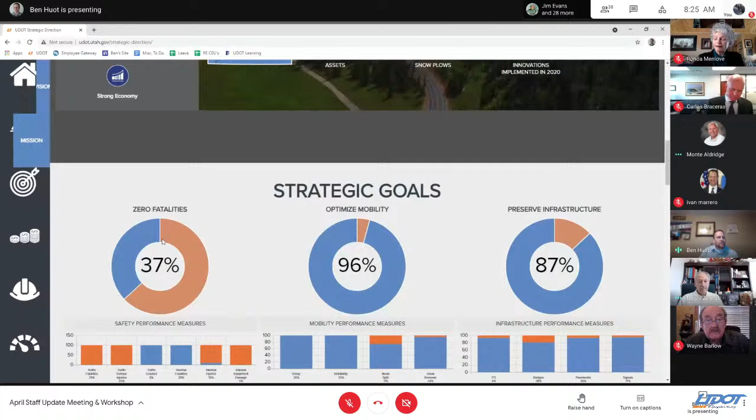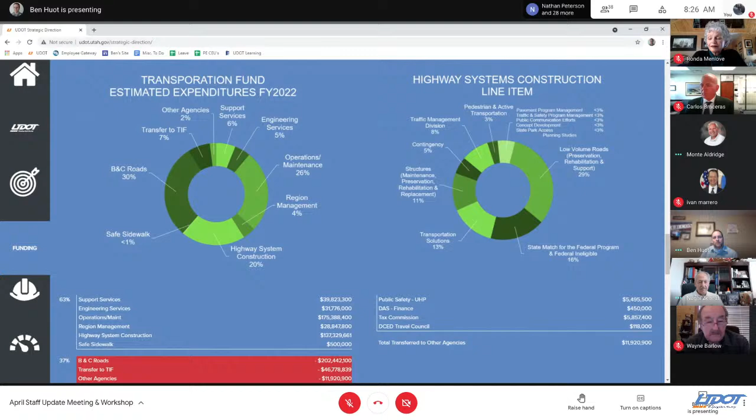I'm going to scroll down to the funding information. I wanted to point out that this is recently updated. Nathan Lee's group updated this information with the fiscal year 2022 funding information, and it reflects the information that Becky Bradshaw went through last month. For example, if you click on the transportation fund, you can see the revenue information that Becky Bradshaw went through. Then if you click on the expenditures, you can see how that is split up and broken out. We went over the highway systems construction line item that ties into some of our funding programs that we reviewed last month. I just wanted to show that's been updated with the current information.

Now I'm going to jump back over to the UDOT website, click on the Transportation Commission link, and scroll down to the process tab. We've seen this before, but it's always good to orient. Briefly, the excerpt from the Utah Code talks about the duties of the commission. The main point here is the commission determines priorities and funding levels of projects, and this is all done through public meetings and providing for public input.

We've also got a few excerpts in here from the commission programming policy. The basic takeaway is that with multiple different funding types, UDOT develops the recommendations and presents them to the commission. As it moves forward, all those programming items are compiled into a draft STIP and submitted for a formal 30-day public comment period, then sent to the Federal Transit Administration and the Federal Highways Administration for final approval. That is best shown through our calendar, a graphical representation of how that all works and progresses forward through our year. Last month, we went over the program summaries.

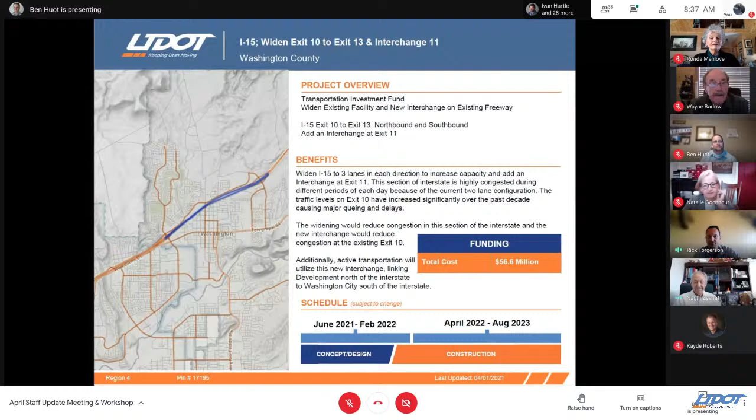Ben, if you want to move to the next one. Toquerville Parkway. This is a project that the commission took action on last March with the city of Toquerville on a jurisdictional transfer agreement, that if that city and the developer proposed to develop most of this road on the west side of Toquerville would build 2 lanes, 1 lane each direction, UDOT would jurisdictionally transfer the old highway of Toquerville over and take ownership of this new parkway. So legislative funding at $18 million is proposed, still the same alignment, to build the 4-lane road. The city and the developer would build the 2-lane roads, and then UDOT would work with the city to complete the parkway with the other 2 lanes for this $18 million. So this project would actually build the entire parkway design now, and we would still execute the jurisdictional transfer once this road is built with Toquerville. This would become the new state highway, and Toquerville would become the owners of the historic route through town. We're proposed to get started as soon as possible on this one as well. Any questions on this one?

Okay, if anybody has any questions, just stop me if you would, that'd be fine. So Ben, go to the next one.

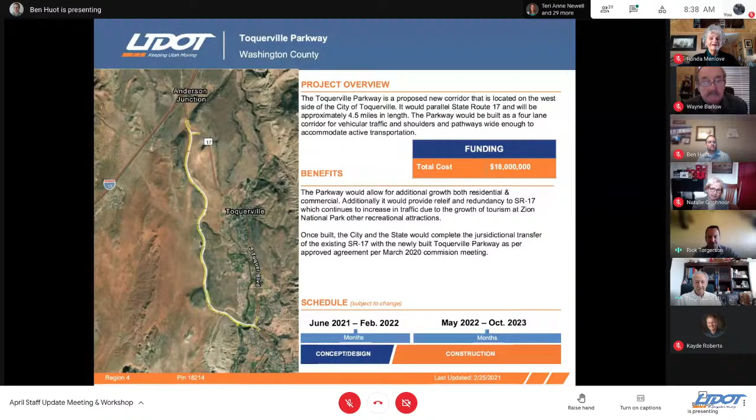SR 132 westbound and eastbound passing lanes. This is the connection between Sanpete County and Nephi. You see on the screen here the town of Fountain Green. This is the last town before you go through Nephi Canyon and come into Nephi, which is Region 3. We completed a corridor study several years ago. Region 3 and Region 4 partnered on a corridor study and identified multiple improvements to the canyon section. These are the 2 projects that came out at the top of the priority list there: a westbound and eastbound passing lane.

So the blue line there shows a big corridor, but that will be broken into a passing lane, one eastbound and one westbound, between mileposts 41 and 45. That's $6.2 million, and we'd start design as soon as we have approval, with construction next year.

Oh wait, we need to adjust this one. I think we're doing this one right off the bat as well. I may have the wrong construction schedule, I think we grabbed the wrong fact sheet. You're right, that should be 2021 and 2022 February, so it needs to be moved up a year. We'll update that fact sheet, but it's this year with construction next summer.

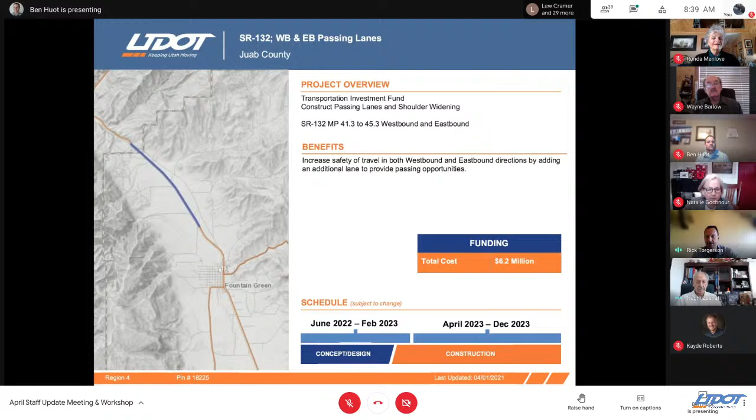East Zions roundabout and improvements on SR9. You had a presentation probably two years ago from the East Zions group, Brent Chamberlain with Kane County, and a couple of developers on the east side of Zion. This is in concert with Kane County's plan to construct a new visitor center on the east side of Zions at the North Fork intersection. Several developers are looking at a new Grand Lodge and a lot of improvements to create biking and walking paths and a whole new experience on the east side of Zions.

Kane County has received their CIB money. Now they're working with the developer for the Grand Lodge, because that's kind of the key to actually paying back their loan for the CIB money, and we're waiting with Kane County to see how that agreement with the developer happens for the Grand Lodge.

But once this happens, we will look to complete a roundabout at the new North Fork Road intersection, where the visitor center will be, along with several other intersection improvements along the corridor, a pedestrian underpass, multi-use path, and some wildlife mitigation as funding allows. We have a little over $10 million, and we're gauging the entire partnership with Kane County, and we'll start working on this project as soon as Kane County starts the visitor center.

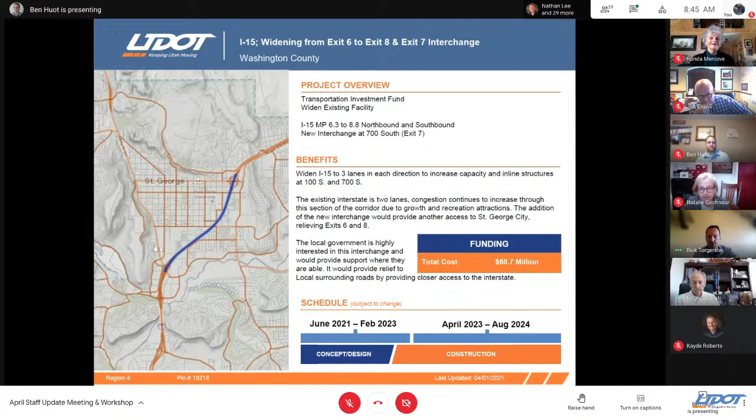Okay, Ben. The last one, I think this might be the last one. The last is I-15 northbound.

We just completed a project from the top of the Black Ridge, which is milepost 38, to milepost 43, near the Kanarraville rest area, this last summer. We're actually still working on a little bit of it right now. But this project would continue that 3-lane northbound section from the Kanarraville rest area all the way to the South Cedar interchange, so 43 to 56. That's a 13-mile long new 3rd-lane section on I-15.

As all of you know, the freight movement on I-15 just continues to grow coming out of the ports of LA, and this would continue that. There's still an uphill grade all the way to Cedar City. Once Cedar City starts to level off a little bit, but still the amount of freight traffic that we have on I-15 is impressive and continues to grow. This would add that 3rd-lane section to really deal with the speed differential between all the semi trucks and the travelers moving along that roadway.

So $50 million - this one's out there a couple of years, so we wouldn't start this until June of 2023, 2 years from the summer for the design work, and then we'd actually start construction in April of 2024 and go to May of 2025.

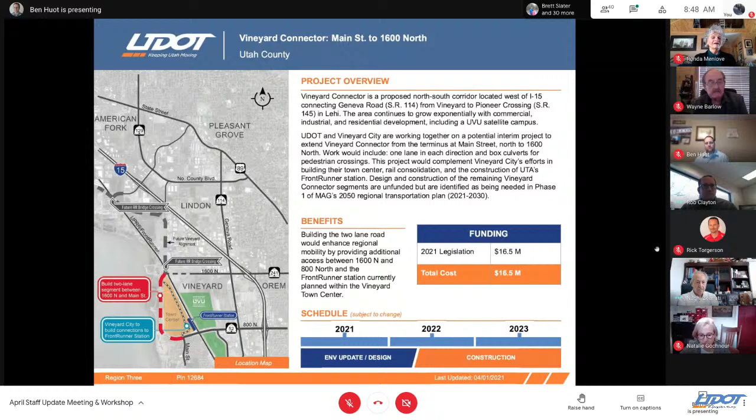This is the Springville 1600 South, 2700 North, Spanish Fork interchange. This is using an existing overpass on that 1600 South corridor that currently doesn't have access to I-15. This project will add ramps to that overpass and build a diamond interchange. Now, that project to build those ramps and some improvements around that interchange already existed - what the legislature did with this project is add the funding to widen 1600 South from the railroad overpass we're going to construct all the way over to State Route 51, on the right side of that map. So with this funding, it brings the total funding for the project up to $79 million.

At the end of the project, you'll have widened 1600 South. There'll be a structure grade separating the railroad from 1600 South. We'll have ramps that connect I-15 to 1600 South. The frontage roads - it's kind of a typical rural situation where the frontage roads are a little too close to the interchange, so they need to be separated away so that it operates efficiently. That work will be done. This is all currently being designed right now, with construction in 2022.

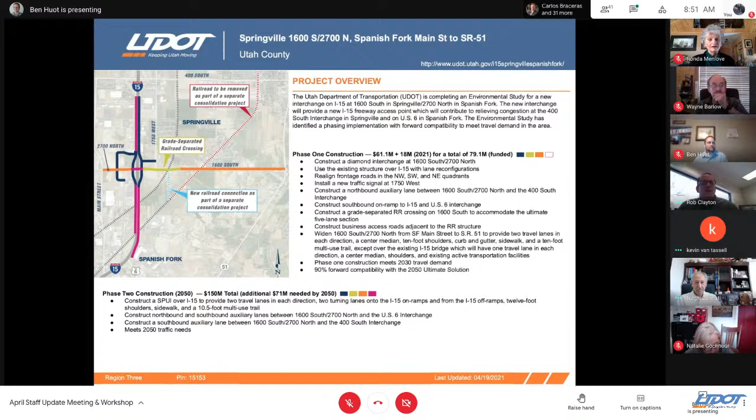Next slide, Ben. Oh, one more. Okay.

Next slide. Hey Rob. Yes, this is Jim Nagi, if I may ask a question.

Since that project is under construction there at the LDS Church and will be done by then, which may add a little traffic, I presume - I know the developer had to do some initial ingress, egress type lanes to get off of Geneva Road to there. Will any of that probably still happen temporarily, because that traffic will start to pick up then, which would be a year and a half or 2 before this project looks like it will be done? Are there some temporary things that are done to assist with that, or what usually happens in a case like that where a project is being done, but there's construction and traffic coming before the project's done? Are there any temporary things that happen in a case like that?

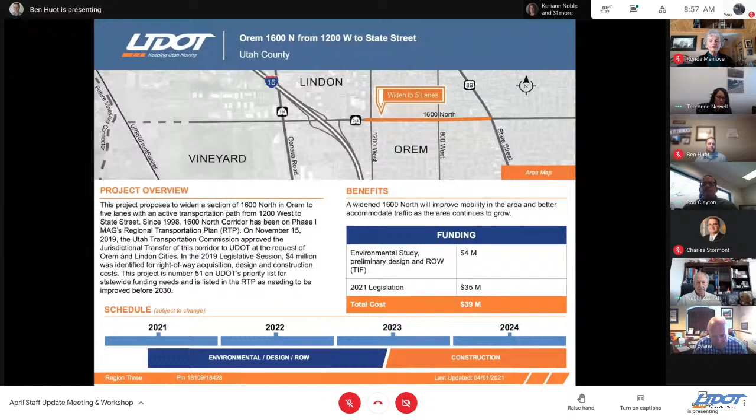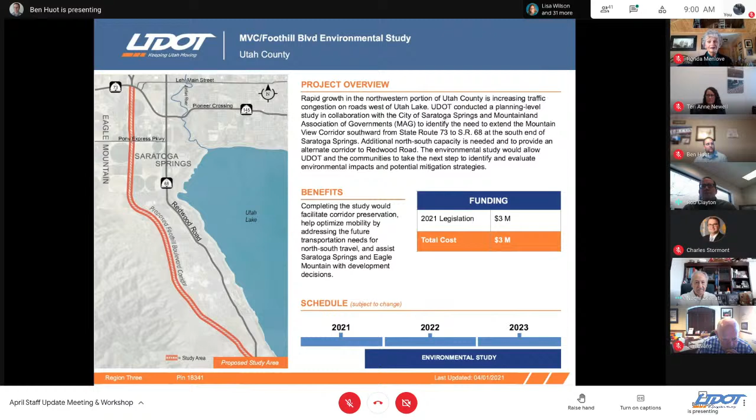And that's the last one in Region 3, Ben. Thank you, Rob.

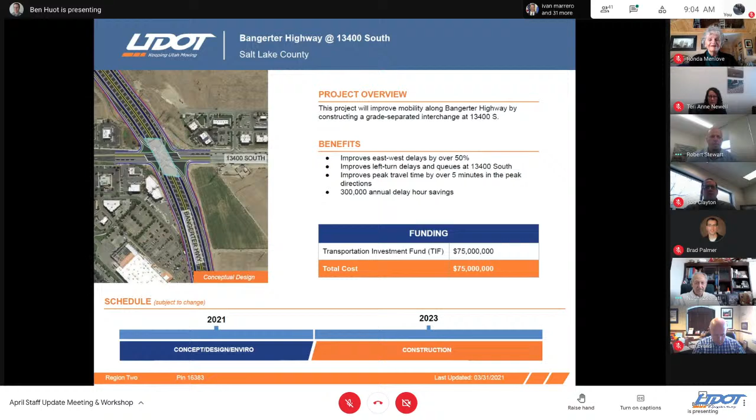Any other questions on this? Okay, the SR 111 project.

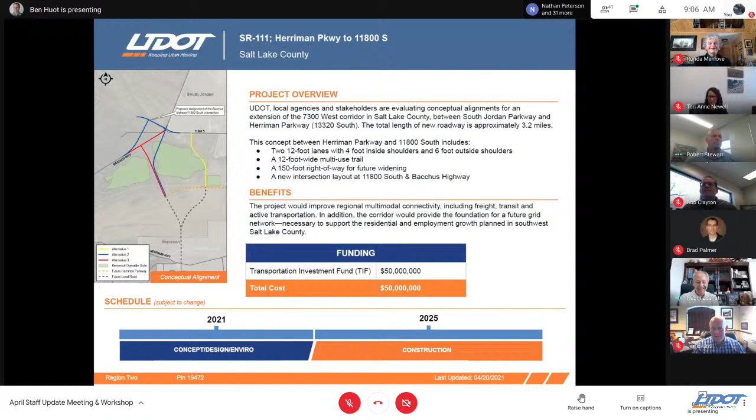Any questions on this? My wife said yes, so I guess that strategy worked. Sucker. All right, next one's Kimball Junction environmental study.

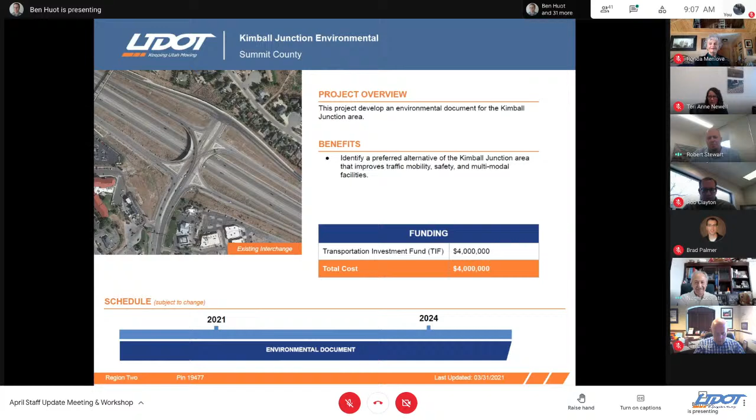Any questions? Ben, I'm not lobbying to go first next time. I was merely kidding.

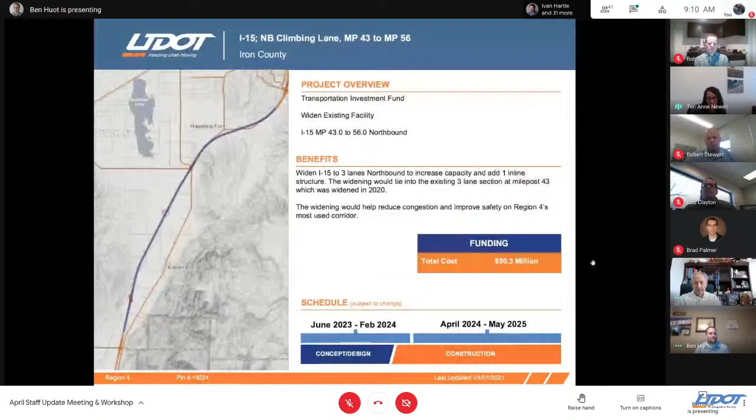We presented a lot of them to you, and as we keep using the language of saying these are legislated projects, so they were stated in HB 433, but they didn't have project values on them. Our job will be at UDOT to manage this list of projects to a total of 705 million.

You can see on this list what they total up to is 704,950,000. So it doesn't leave a lot of room for things to change on these projects, but the commission will be responsible for setting the funding levels on each of these projects. So you can't change what's on this list, but what you are approving is the total amount for each project.

So if we have a project that comes in under what we expect, which we hope there will be a few that do, because we will also have some that maybe come in a little over, we have some latitude. You have latitude to adjust those project values, but we have to total up to 705 million to stay within the legislation.

So there will be a little bit of a tricky balance with this list, and these projects get managed a little bit differently. Lisa and I will have to make sure if somebody has something that starts to go over, we may have to adjust the scope on it and back off a bit to stay under that 705 million total. So I just wanted to clarify for you and remind you that's how this list works, which is a little bit different from the next list we're going to talk about.

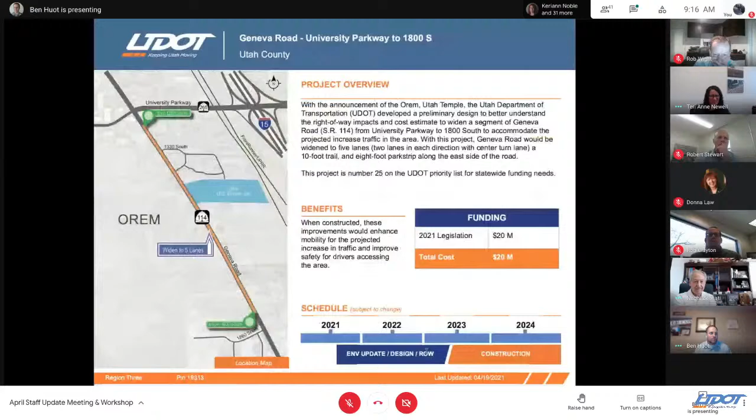So now we're going to transition into the regular process for TIF highway projects. This is related to a topic we've talked about a little bit called project prioritization over the past year. In January, I believe we went through some information on how we use the prioritization process and developed recommendations on these projects. This right here is the list of projects that Terry showed last month with respect to the prioritization process.

This slide is that same exact list in that same exact order with the project values and the estimated construction start dates at this point. And then, similar to what we did last time, for this presentation we grouped those by region and sorted within the region by estimated construction start date, so we can walk through them in an orderly manner.

Another question, Ben, from the public: did UDOT have any input on this list? As in, if the legislature makes a decision on these projects list, do we have any input from UDOT saying yes we should be, should not be, or any kind of comments?

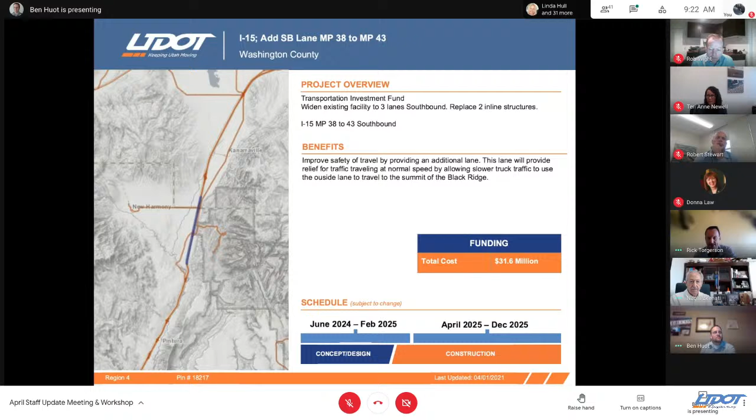These timeframes were all relative to overall cash flow in the entire TIF program, of how all these projects can fit into that entire program out to 2030. So that's our 2 projects in Region 4.

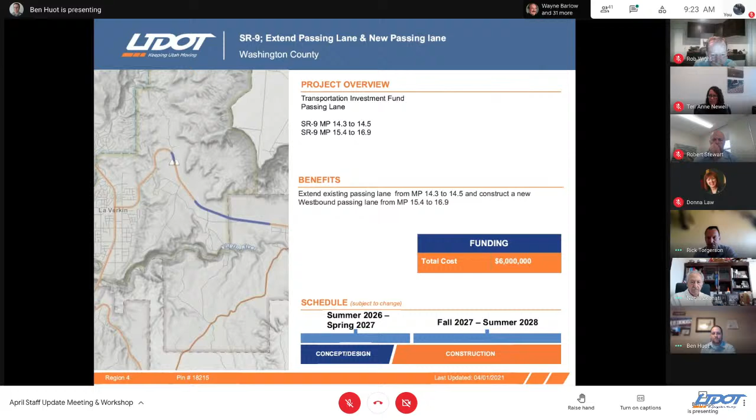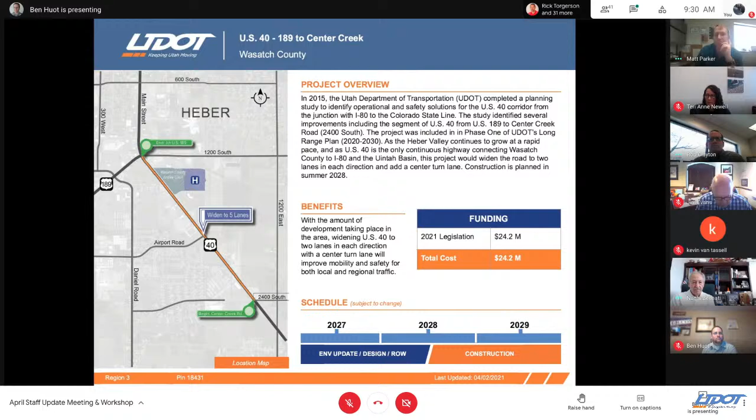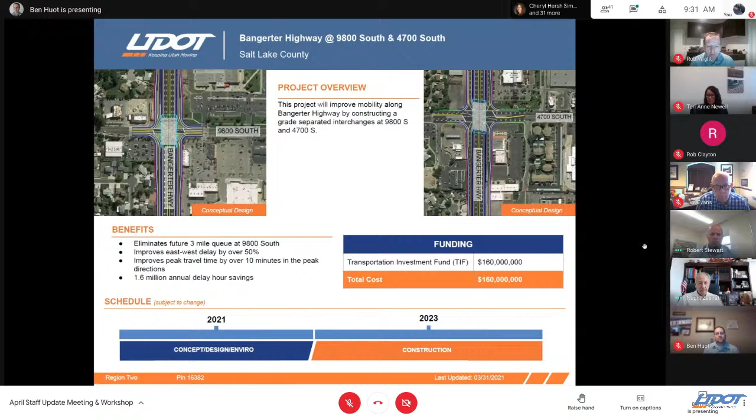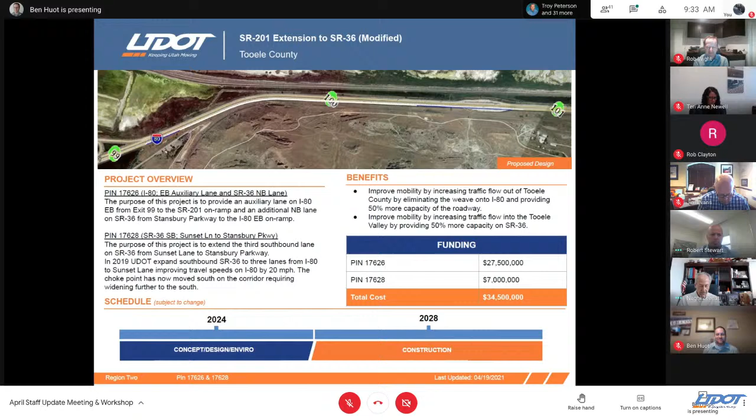Did I confuse everybody thoroughly? Did that make sense? All right, next one.

Any questions on this? The next one.

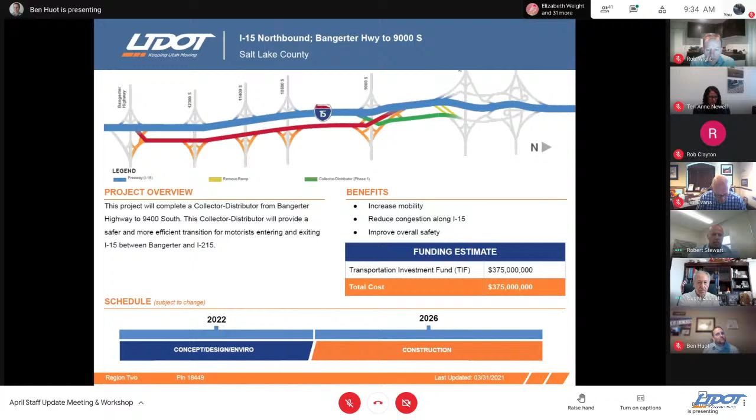Okay, next one. Mr. Chairman, may I just make— go ahead. Robert, are we having any extra accidents on that? I've had some informal comments with people saying the weaving and everything else, with the new changes, are certainly disconcerting to some older drivers, of which I'm one, but I don't have that problem. I was just wondering if there's any heightened challenges we're seeing in reality with the recent changes there. I'm not aware of any challenges. In fact, I think the data I've seen shows a reduction in accidents in the area.

It is new, right? And with anything new, there is some confusion. The signing that we had until we got the extra lane striped tended to be a little bit confusing. But my latest conversations would suggest that confusion has steady stated over time.

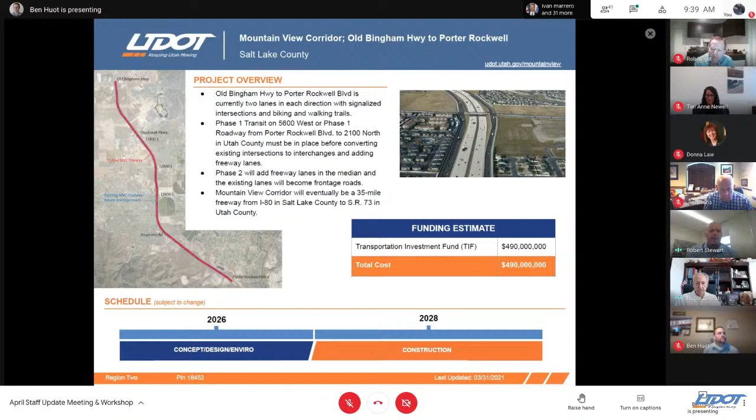Okay, I think that's Region 2.

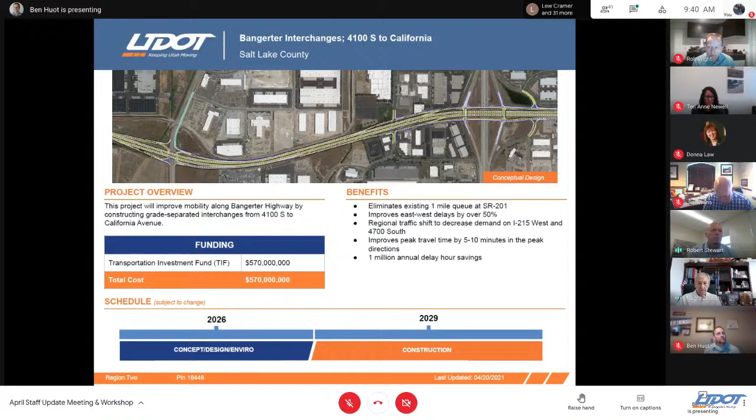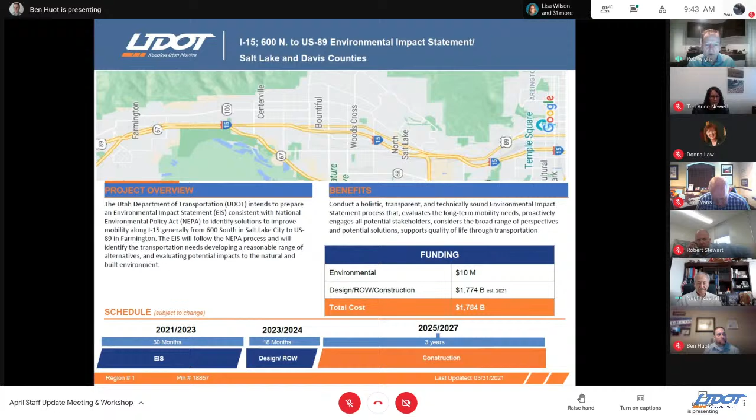Okay, well, go ahead. I was just asking if anybody has a question, ask.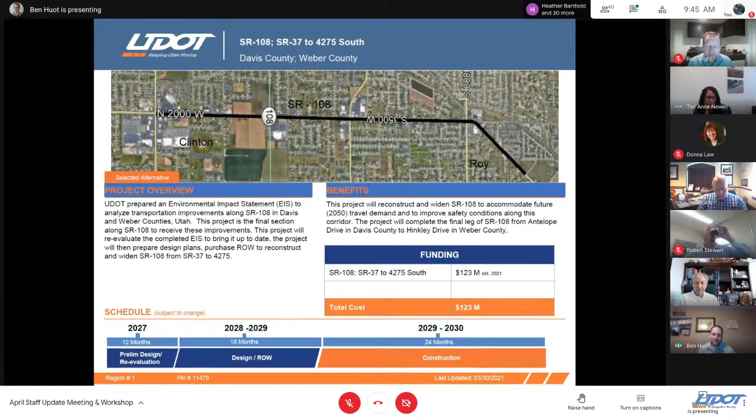But Ben, is that a wrap up of this list? That is programming, capacity programming into 2030 recommendations. So yeah, I'll go back up to the top. He knows what I'm about to ask him, doesn't he? He's anticipating the question.

So just to summarize where we are, there are maybe a couple points I want to make. I know there are a lot of people behind the people you see on the screen, but the work it took by I can't count how many people helped contribute to these two lists. This amounts to $5 billion worth of programming for roadway projects. And when Ben made a subtle comment about on a very cold day, the reason that's memorable is I have to apologize to lots of our team members who we said, this is a lot of money and this is really important.

We think we need to be in the same room together, working out a lot of details about how we program out through 2030. So we had probably 15 people in a room, a big room, socially distanced, with masks on, with all the doors open. And it was bitterly cold. I do remember that Ben went to find more stocking caps for people to put on.

And he also traded places with Becky Bradshaw, who was close to a door and was freezing to death. And we needed Becky to stay in the room because Becky creates all the projections for us so that we know what we think our revenue will be out through 2030, subtracts how much we're paying in bonds. That gives our group the money to know that we have to work with.

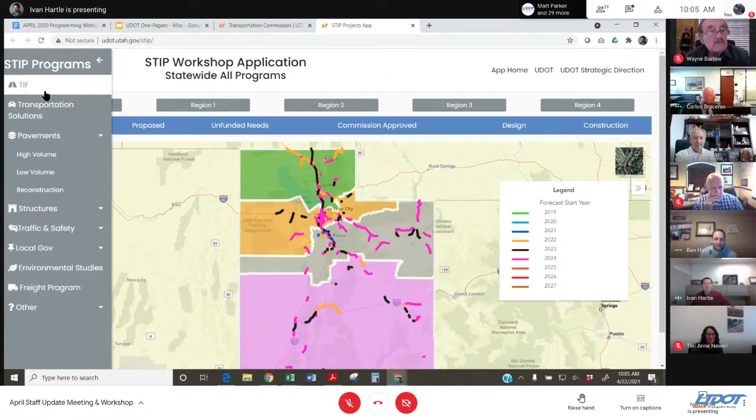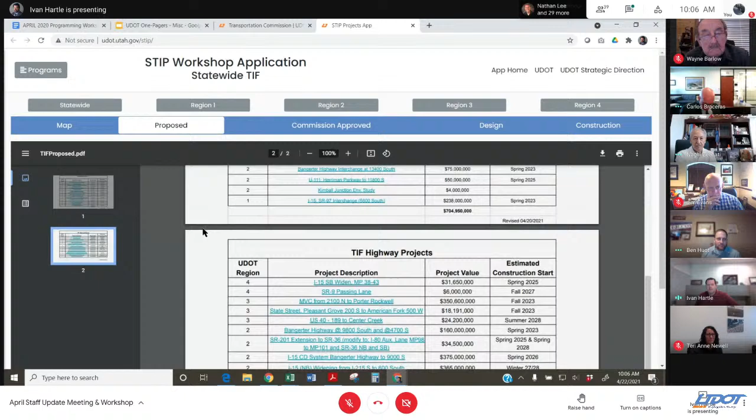Under TIF, if I click on the TIF list here, the proposed tab here, it does reference the same two lists, the legislative list and the TIF highway projects list that Ben's been talking about. So that's where those two are found under the proposed for TIF.

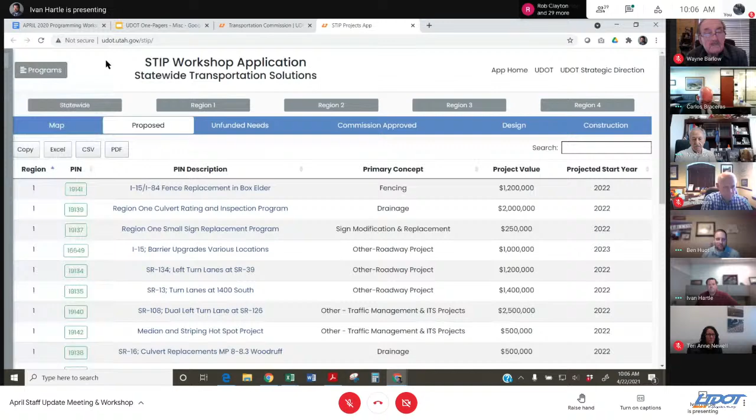So backing back up to the STIP programs, I'm going to click on transportation solutions. If I select region 4, it narrows down our region 4 list of projects. The idea here was to let the regions go through - not necessarily every summary sheet as before - but show the list and highlight projects as they desire. So I'll turn the time over to region 4.

Okay, well thank you, Ivan. This is Monte Aldridge, Deputy Director for Region 4. Appreciate the opportunity to talk about our transportation solutions project, as said many times in the past - this is a great program for us to address various needs throughout the region.

As you can see on our project list, we address things from passing lanes to bridge rehabilitation to lighting upgrades, and various other types of projects. The program is very important for us to be able to address the very diverse amount of needs that we have in the region.

So a couple I want to highlight: the passing lane on 191, just as you exit I-70 and head south towards Moab. Oftentimes when you take that exit you'll get behind a recreational vehicle or a truck or something, so this will create a passing lane that relieves some of that pent up pressure for folks wanting to get around those slow moving vehicles. That'll be a great improvement on that corridor.

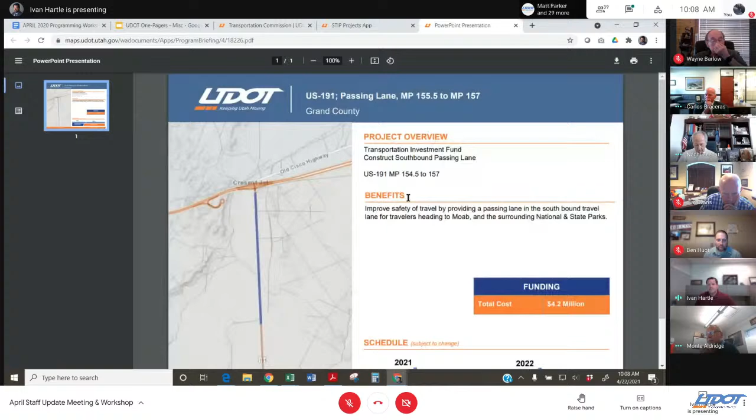So the project that Monte just talked about, these clickable links - if I click this, it pulls up that same similar look and feel to the project information that Ben has been talking about and using this morning. So, to Monte's point, here's the map, I-70 coming off of I-70 heading south.

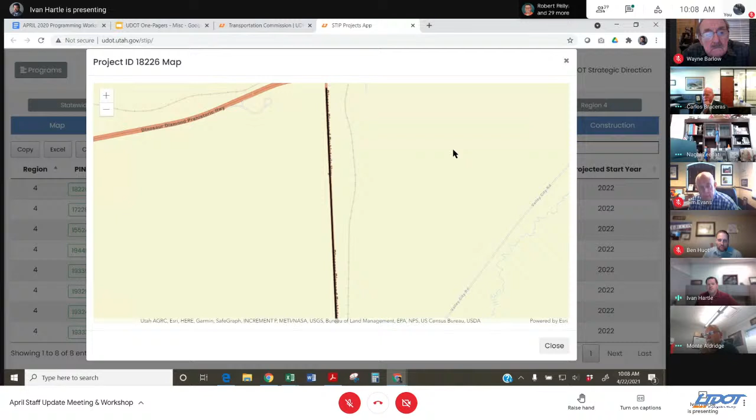Just a quick little overview about each one of these projects - you can click this program brief and it provides that. If you're just interested in the where, you can click on that project location and it will provide a quick little map, no other information other than just where that project is located. So you've got these two options: either the program brief that provides that one-pager view, or clicking on the pin description for that project location.

All right, sorry Monte, go ahead.

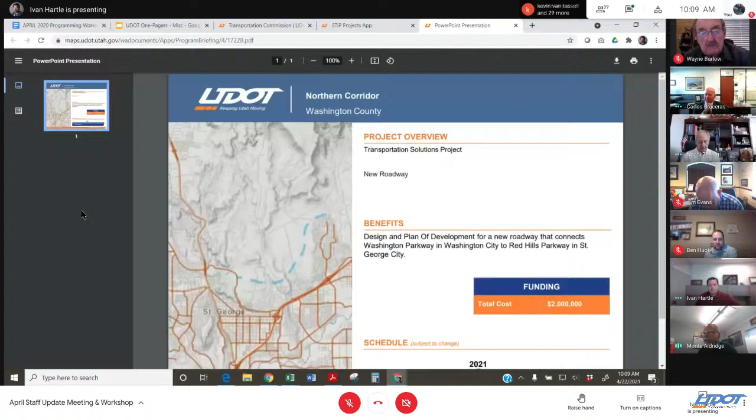Also wanted to visit just a moment about the Northern Corridor. That's the second project listed. We received the ROD, the record of decision for the environmental impact statement, back in January. We're going to start off with $2 million to begin doing design and develop the plan of development for the new roadway. That'll allow us to get started on this project, which will be very important for Washington County.

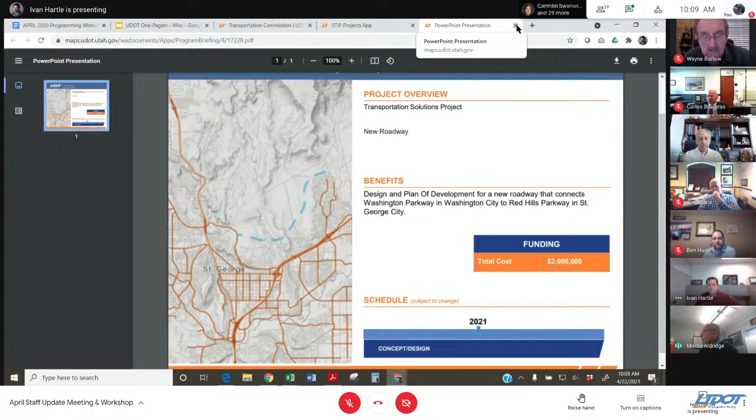Going on to one other one I just want to mention, one that I think is really important to our crews in the area, is the I-70 box beam replacement. That's the last project on our list. It's a $2 million project to begin replacing a box beam barrier. That's the only place in the state we have this barrier, and it's in Salina Canyon, a windy, curvy mountain road.

The challenge is that when it does get hit, it requires quite a bit of labor to get out there and replace it, and it exposes our crew to traffic in very tight quarters, a very difficult situation to put them in. So we're beginning the process of replacing it. The barrier is outdated, and this will be a great opportunity to improve safety, not only for the traveling public but also for our crews as they perform their job duties.

The rest of the list is again a compilation of a lot of variety—lighting, extensions, things of that nature. If there are any questions on those, I'd be more than happy to go into more depth.

Ben, I don't know if this meets what you anticipated as far as giving an overview.

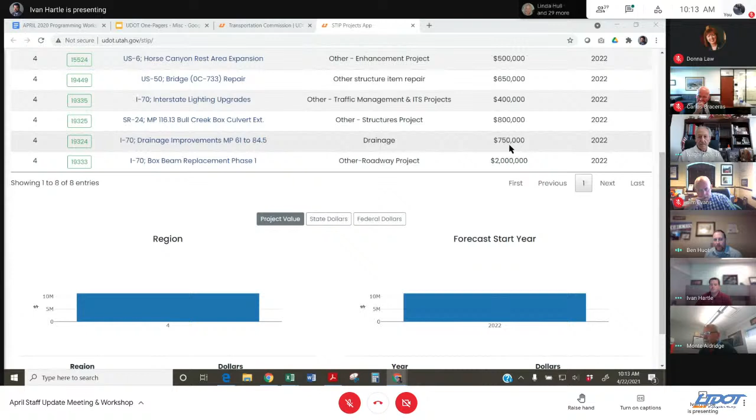I'll jump in to add a detail I probably should have mentioned when we went over the program values last month. Transportation solutions is part of that, and one of the exercises is trying to determine how much is available for transportation solutions and how that can be allocated. Just to give some background, I believe we ended up this time at about $11.3 million per region. Each region has their list of items they want to try to get to, and the allocation recommendation helps determine which projects they can get to each year with this list. Hopefully that gives some background on how that works.

Okay, any other questions regarding our Region 4 project?

Monty, is $2 million for the Northern Corridor going to be enough for you to do this study? It's a massive undertaking. That's going to begin the design and the plan of development. We believe that will get us a good start, and then we'll see where we end up with developing that. Are you going for 2-lane or 4-lane? What is the outcome? I think the intent is to decide that through the plan of development, and perhaps get the design done, then release to build some of the drainage and fencing, and work through and see how the funding comes forward.

Okay, thank you. You're welcome.

Any other questions? Okay, thank you.

Thanks, Monty. Well, I guess we'll jump into Region 3 then. I want to highlight the first project on the list there, Ivan.

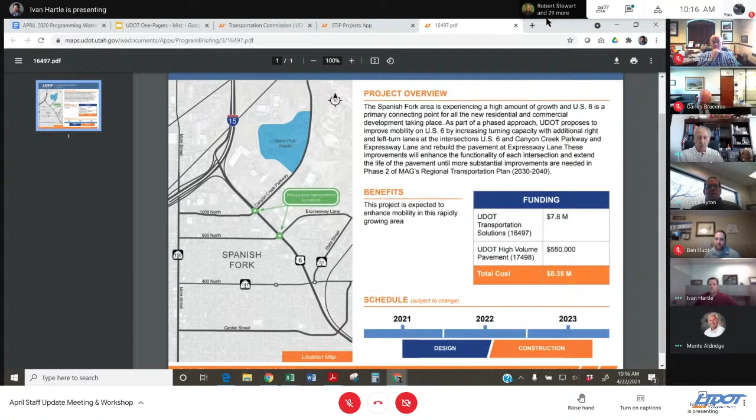Rob, would you please elaborate on the operational improvements at an intersection? What do you mean—signal changes, or improvement of the signals or lights? What do you mean by operational improvement?

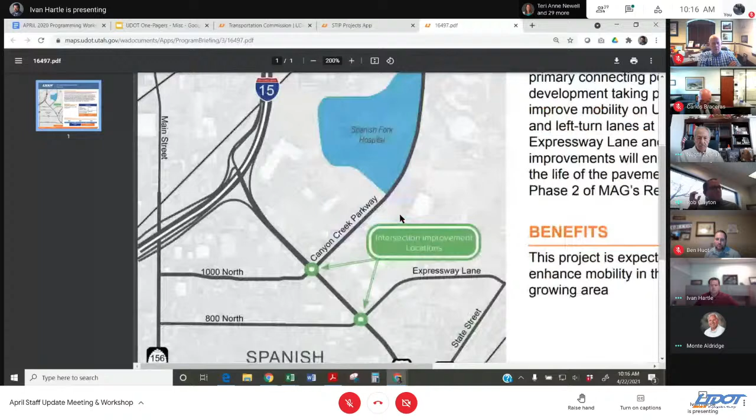Yes, thank you. So what we'll look at is whether there are sufficient turn lanes. In both cases we would be adding left turn lanes, and maybe making the storage for the turning movements longer, so that we can get vehicles that want to turn out of the flow of traffic, so they're not blocking through vehicles. It's those kind of improvements.

Okay, because I know I've been stuck at that particular destination, waiting to see who's going to make the first turn, kind of like a courtesy call. That's right. Okay, thank you.

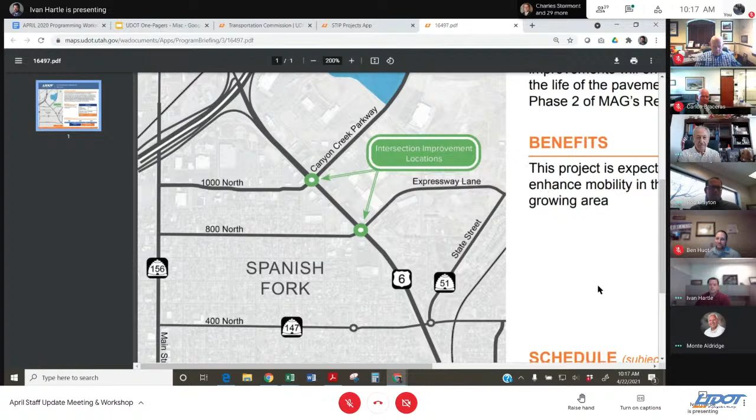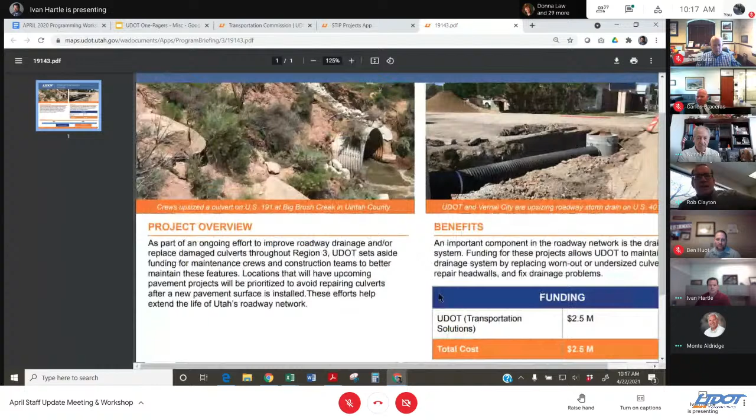Yep, you're welcome. Okay, Ivan, could you open up the drainage, the third one? So this is a project that existed in the last STIP cycle, and we're proposing it again. This is $2.5 million that we use to address drainage issues happening around the region.

Drainage is so important to what we do. Our ability to keep water away from the roadway is critical to the life and longevity of the pavements. It can even impact safety. In the case of Big Brush Creek, pictured to the left, the failure of that culvert actually threatened the roadway and caused us to close portions of it for a time. Had it continued on the path it was on, it would have probably taken out the roadway.

So it's important that we get these drainage improvements in place in a timely fashion, and that we're able to keep on top of it.

I was just recently out visiting with the Eureka Shed, and they have a project using funds from last year where they're extending the culverts so that the end of the culvert is 20 to 25 feet away from the roadway. Then they come behind that and flatten the slope up to the road so that vehicles, if they leave the road, can recover more easily from being errant. On a lot of our rural roads, the culverts aren't long enough to allow that type of activity, so this money really gives them the opportunity to make those kinds of improvements that have such a big impact on safety.

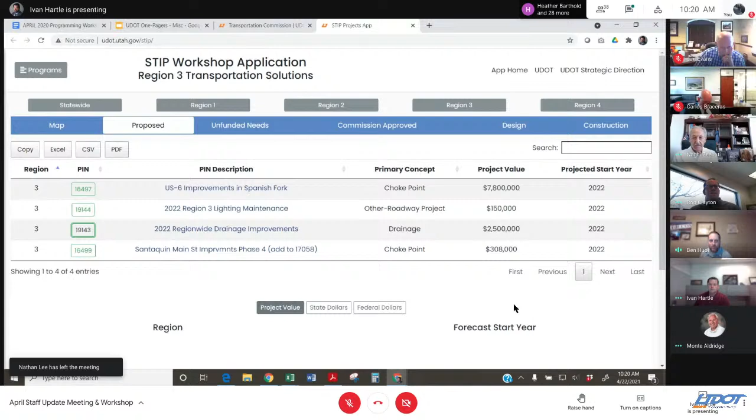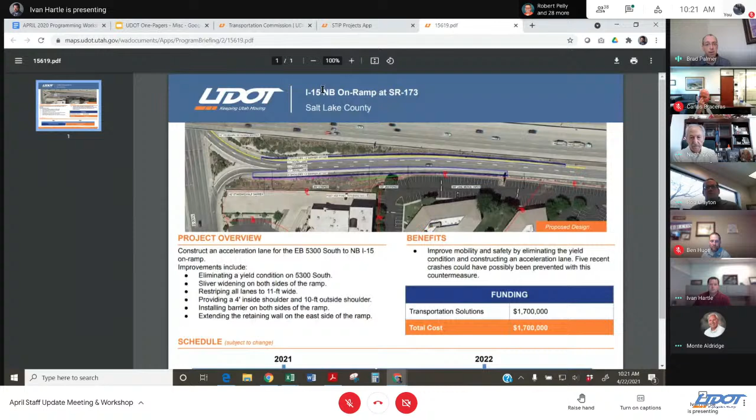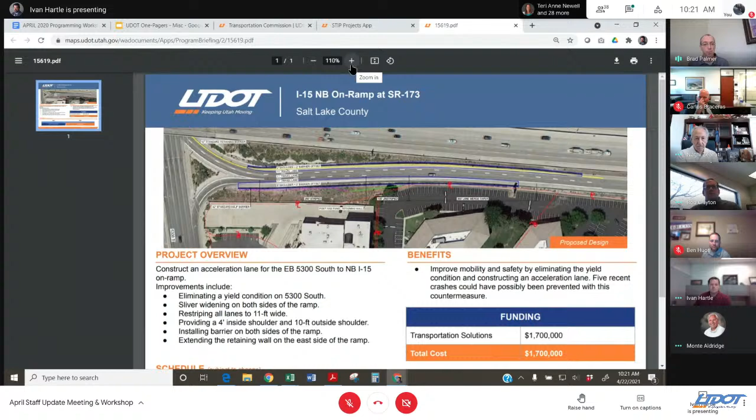The couple I wanted to highlight this morning—Ivan, if you could select 15619, the top one there. This is the on-ramp to I-15 at 5300 South. If you've ever driven that ramp going eastbound to get onto northbound I-15, you encounter a yield condition on that ramp.

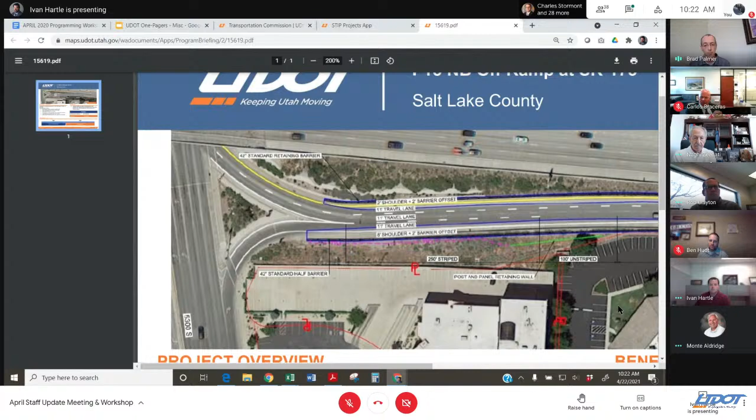We get quite a bit of phone calls from the public. They don't like that yield condition—a lot of them aren't expecting it, it's a little unusual on our ramps. We've had several accidents there in the last few years. So what we're proposing is to remove that yield condition and widen the ramp a little to allow an extra lane so you can just drive right on and merge with traffic. We just recently completed the same type of improvement on the southbound ramp at the same interchange with the I-15 southbound project, and it's working very well. For 1.7 million, we feel we can get a great improvement here.

See any questions on this particular project?

Okay, Ivan, if you could go to 18463. We wanted to highlight this. Over the last several years, you're probably aware that we've been replacing all of our overhead signs in Region 2. We've got 2 projects remaining that would get them all completed. This one would be on I-15 northbound, so everywhere that the current I-15 northbound project is not located, this would replace those remaining signs—pretty much from about 215 going northward. These projects have been really good for the region.

As Commissioner Cramer has pointed out in the past, it improves the way that the traveling public and visitors see our road system. So it improves the image of the state, but it also provides benefit with the new technology in the sheeting. It allows us to eliminate lighting that we currently have on some of these signs. The sheeting is so reflective now that we can actually remove that lighting, and the headlights themselves provide enough reflectivity that you can see them very bright at night, even brighter than with lights on them.

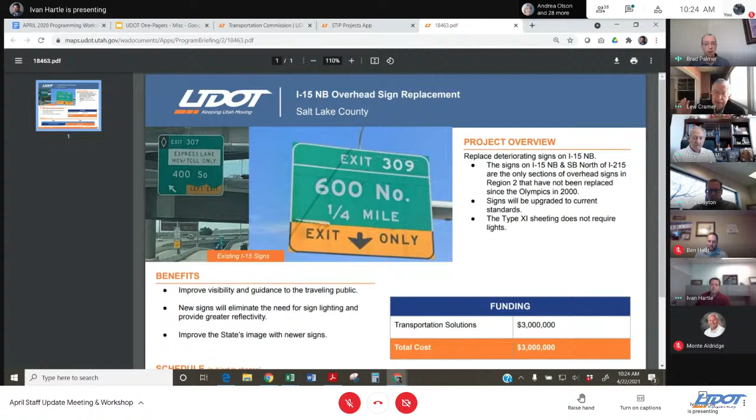Mr. Chairman, Brad, that is excellent. This is Commissioner Cramer—no surprise, but it really makes a difference. We get so many visitors, and thank you very much for doing that. We love the Transportation Solutions program for its flexibility, and this will make a difference. So big thanks from the viewing public, as we say. Keep up the good work. Thank you. Thank you.

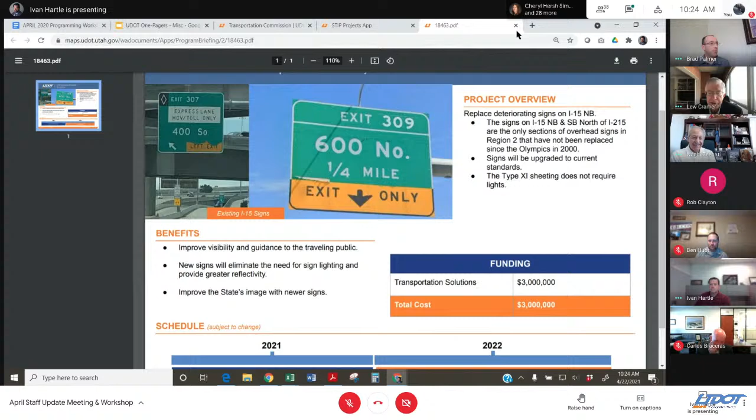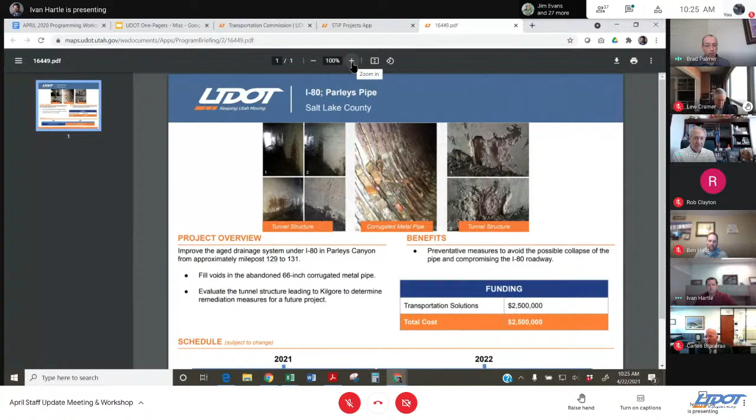One last quick project here—Ivan, if you could click on 16449. This is a maintenance project we've been trying to fund for several years. I wanted to point this out mainly because we anticipate this would be a two-phased project. Back in 2013, we replaced a big drainage trunk line in Parley's Canyon, about 66 inches in diameter. As you can see from that middle picture, that's the old corrugated metal pipe that's no longer in use—we've replaced it, but it's still in the ground.

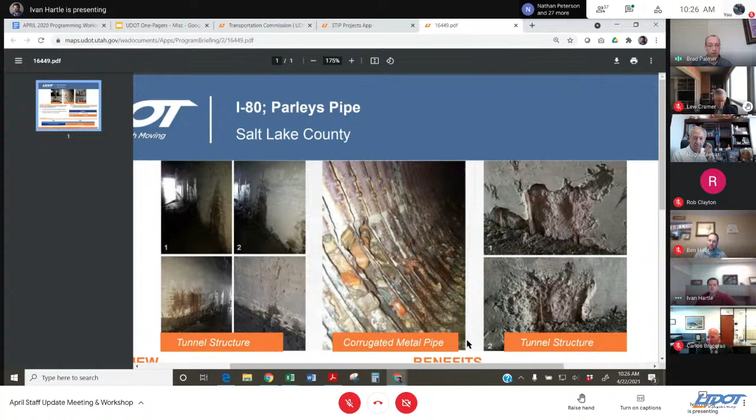The project at the time didn't have enough funds to backfill that pipe, so it's still empty and deteriorating. We want to fill that pipe so it doesn't eventually start to sink and cause the road to slough. So this project would go in and fill that pipe with backfill or flowable fill. Then phase 2, which we would most likely propose next year—if you look at the pictures on the left and right, that's a tunnel structure that goes under I-80 over to the Kilgore pit.

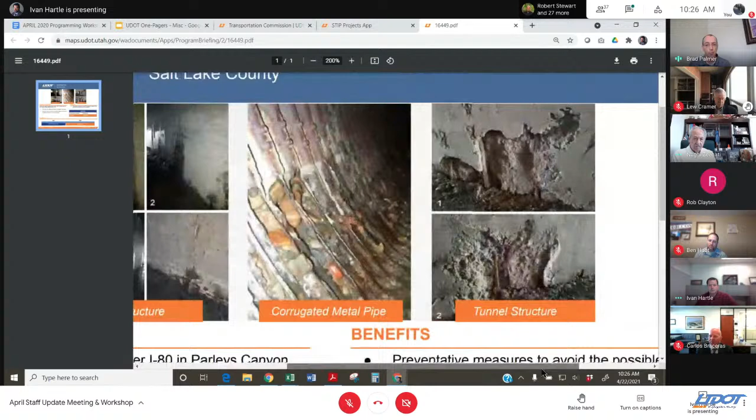It's got, if you can see from the pictures, water coming through the walls, the concrete starting to peel off a little bit. So as part of the funding for this project, we would have an analysis done by the engineer to determine what remediation efforts would be needed for that structure. And then from that analysis, we'd come back next year and seek funding to put the fixes in place for that particular box structure. So this project, we're asking for 2.5 million, and most likely we'll be back next year asking for additional funds.

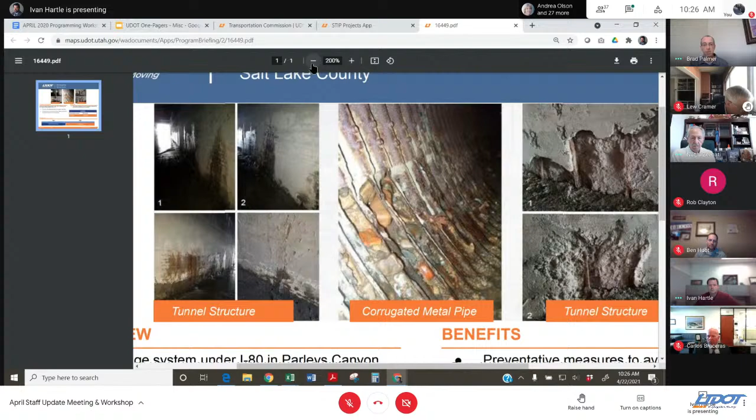And that's everything. Those are the three that we wanted to highlight in Region 2. Does anyone have any questions on any of the list? All right, thank you.

This is Rob again from Region 1. I just want to echo that we appreciate and thank the Transportation Commission for programming these projects. While they may seem small dollars, we just programmed something like $5 billion worth of other projects. I know these are small dollars, but they make a big difference in the communities and for the facilities we're working with. So I really appreciate those. And as a region director, it helps to be able to address these needs that, while small, maybe also are very important.

Ivan, if you could click on that first one, the I-15, I-84 fence replacement, I'm just going to highlight a couple of these. Now, this is not something you see very often as a project, but when the freeway was first installed back in the 60s and 70s, the fencing was put in. A lot of this is the original fence. In urban areas, this is probably not as big of an issue, but in rural areas where you've got a lot of cattle up against the fence, they push through it. Those of you who have worked with cattle understand you have to maintain those fences, and we've tried to, but some of them are so rusty that they're breaking off when a cow leans against it. And what that leads to is the possibility of those cattle getting out on the freeway. So this project would replace a large amount of fence on both I-15 and I-84 in Box Elder County. This is something our maintenance crews just don't have the funding in their maintenance budgets to keep up with. And so we felt this was an important enough safety issue to fund it with our Transportation Solutions funds.

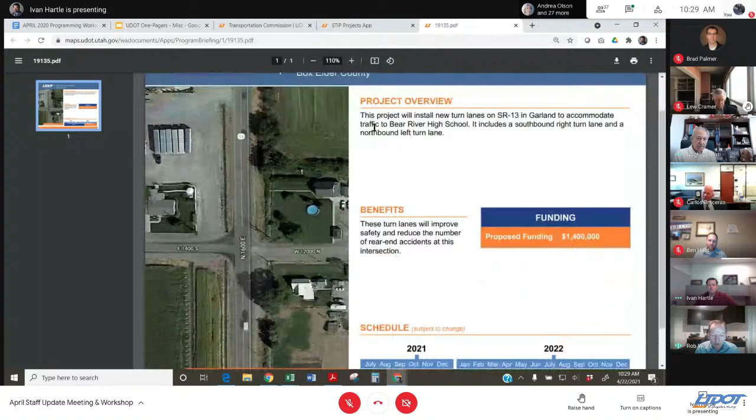The other project I wanted to talk about is the SR 13 turn lanes at 1400 South. We get this situation a lot. This is near Bear River High School in Garland, up again in Box Elder County. This is a small community, not a lot of projects come through here. The area is growing, not the type of growth you see in Region 2 on the west side of Salt Lake Valley, like Robert has talked about. But this particular need is the high school. When high school lets out, this becomes quite a congestion issue and a safety issue. So this project will take $1.4 million and improve this intersection for better sight distance, better turn lanes, to address the congestion at this particular intersection and improve safety.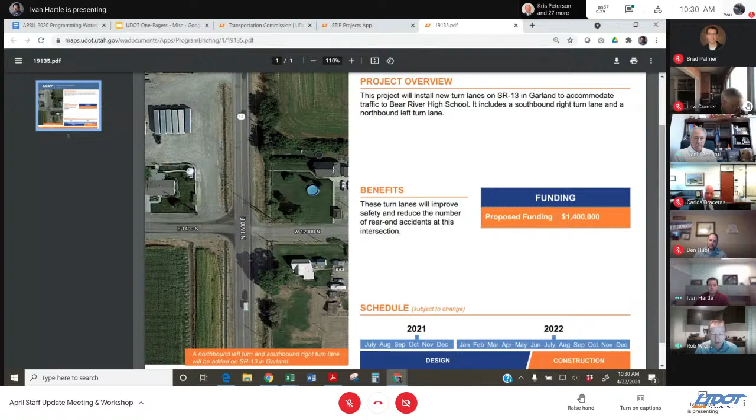And you'll see in our list of projects, if you want to go back Ivan, we have several other projects similar to this, where we're improving an intersection for safety and capacity. This is a very good use, I feel, of this type of money to address those community needs where it may be a small need, but it's also very important to that particular community. So I'll take any questions you might have on any of the other projects or those two at this time. All right, thank you for your time.

Rob, before you take off, I just want to say thanks for the Bear River High turning lanes and the fencing. Those are critical issues in Box Elder County. I'm a Box Elder County native, Bear River High graduate, and my father was a cattle rancher, and those fences are a huge issue. This will be a great improvement for safety. So thanks. Thank you, Commissioner.

All right, thank you. So that's the Region Transportation Solutions projects. And then we do have 4 projects that fall under the statewide transportation solutions category.

I know that there was some text messages going back and forth this morning with some Murphy's Law system issues. It looks like some of those have been resolved, and we'll keep working on those to make sure all the information is available as far as the program briefing. So thank you, Ivan, for all the audibles you probably had to pull behind the scenes in the last hour or so.

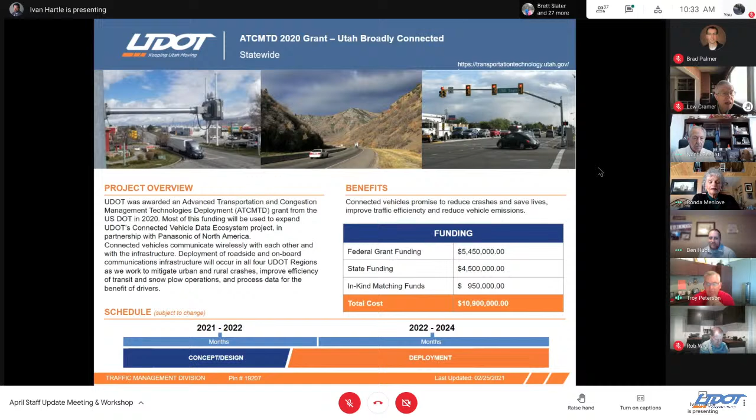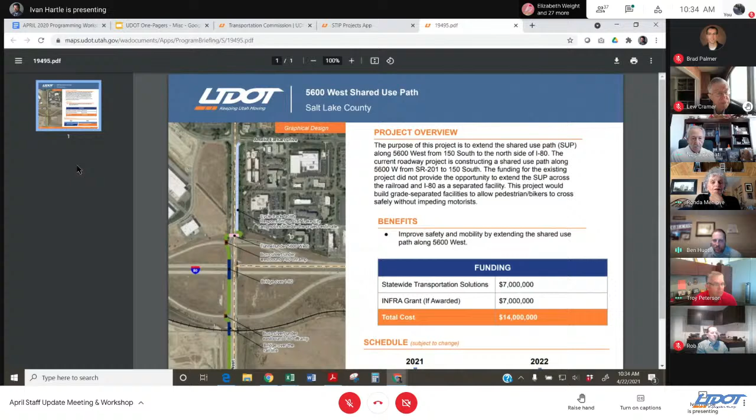So the second one on the list, that is a match for the INFRA grant that we talked about last month at the commission meeting for the 5600 West shared use path. So that would be considered a contingent request for if that grant was awarded, to do the match. I'm not going to go into too much detail unless there's specific questions, because we did talk about that one last month.

The next one, so Ivan Marrero talked about some highway infrastructure federal funding a few months back, and one of the allowable uses of that federal funding was electric vehicle charging infrastructure. So we are recommending or proposing a project for $2.5 million to coincide with the electric vehicle infrastructure plan that Lyle McMillan in our strategic investments area is developing. So that's a request for $2.5 million for that program to advance electric vehicle charging infrastructure using that allowable federal funding.

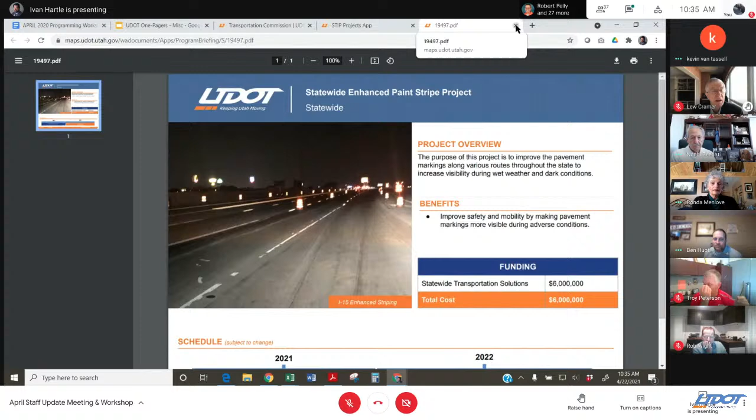And then the last one is an enhanced striping project for $6 million, similar to the project we discussed last year for $20 million, I believe. So it would add some additional funding to keep going with that enhanced striping implementation, which is always a need in various locations. So those are the four.

Go ahead. The question I have is, is this for permanent striping or temporary striping? What is the scope of this completely? 60% of the complaints I get is on striping and line staining. Are we making progress there and getting improvement besides going back to the old paint we used to use?

I may look to Lisa to decide who the best person is to start, if we put you on the spot, Lisa, but the best person to talk about the striping. I would nominate Robert Miles to chat about striping. Thank you. You bet. What can we do for you?

Well, the question is, a week ago Tuesday, I traveled the third worst time I've ever come back to the basin. It was a snowy, wet storm. The highway wasn't that slick, but the lines were covered, a lot of the lines had disappeared. I have a great appreciation for the roto mill and the guiding of the line, but we still have a lot of areas that we don't have that. When you're 2.5 hours from Fruitland to Vernal, it's not a fun trip. But the question I have is the lines, we paint them and they look good, but by the time winter's over, they're pretty well gone.

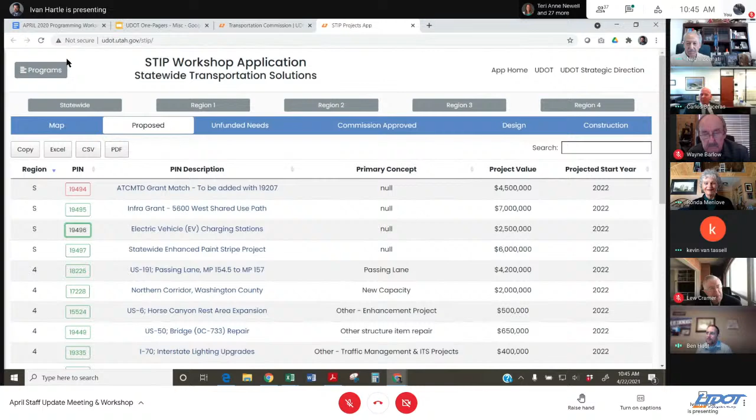Alright, thank you. With that, I'll have Ivan switch over and go through the structures rehab and replacement project program and list. So our request today was to walk through our STIP application, make sure everybody felt comfortable navigating it, as well as showcasing these projects similar to our transportation solutions. We do not expect to present every project; however, if there are questions, we will respond to every question, so maybe we can get to every project, but we'll take that at the direction of the commission.

So under our STIP programs, in the upper left-hand corner, we have our structures listed here, our rehab and replacement. Here is our list—we have a proposal of 6 projects. You can see across the regions: 4 in region 1, 1 in region 2, and then 1 in region 4. Each of these projects has its own program briefing, as well as the location PIN description, whether it's a replacement or new bridge and structure, and the project value as well as the projected start year. I saw Cheryl on the list a minute ago, so we have Cheryl available, as well as each of the regions, to answer any questions on our list of the 6 projects. So I will open the floor up.

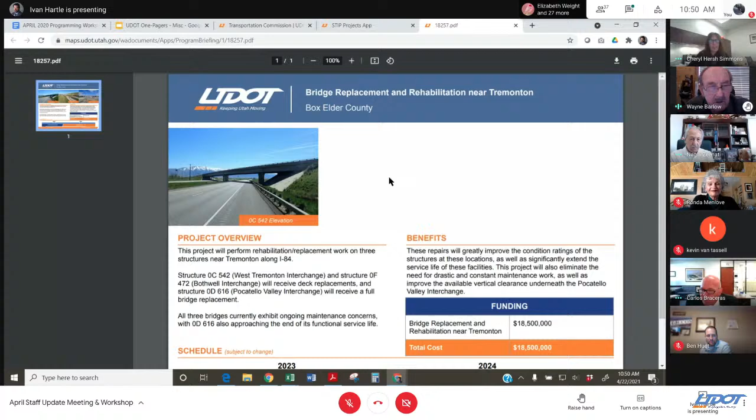Yeah, I have a question on 18257. Quite a bit of money there near Tremonton. Any of those on I-15, or are they elsewhere?

How about Rob or Cheryl talk to this? Yeah, so these are structures that cross in that area. We tried to do them as part of an earlier preservation project, but the condition had deteriorated too much. So now we have to go in and do something a little bit more robust with some deck replacements. Right now these bridges are continual hardships for our maintenance crews. They're continually patching these, and so this will help eliminate a lot of the issues that they're having with those bridges. Thank you.

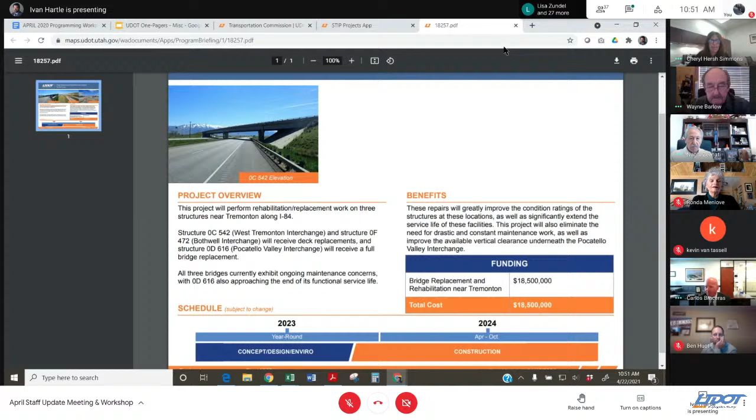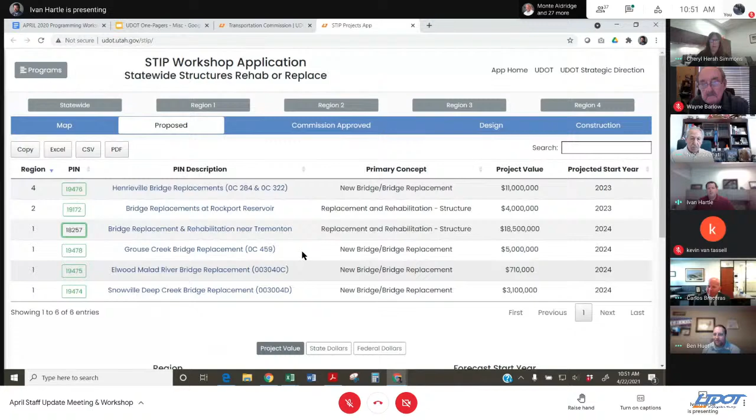Okay, if we're all right to proceed, we'll move to our pavement programs. Again, clicking programs at the top under our pavements, we have these little sliders that help manage that. Under pavements, we have our high volume list of projects. There are more high volume projects out here than our structures projects. There's 83 projects listed under our proposed section. We do not plan on going through each one, unless you'd like to.

Can you show the map on that one, Ivan? That might be a helpful visual.

Many pavement projects, high volume pavement projects throughout the state in this program. Part of our goal, like with the region workshops, this and today's meeting, is to put a spotlight on these projects, how information's available, and direct people to our Transportation Commission website, this big submit comment button here, as well as here - they go to the same location where we're trying to drive or allow people to come in, take a look at these proposed projects, and provide comment for the commission. Back to the calendar that Ben talked about as well. This is the list of the projects that we're presenting for this month. Next month we will come back with the commission - actually in June we'll come back to the commission, asked to publish these projects to the draft STIP, which will open it up even more, another medium that we can highlight and allow more public comment to be gathered.

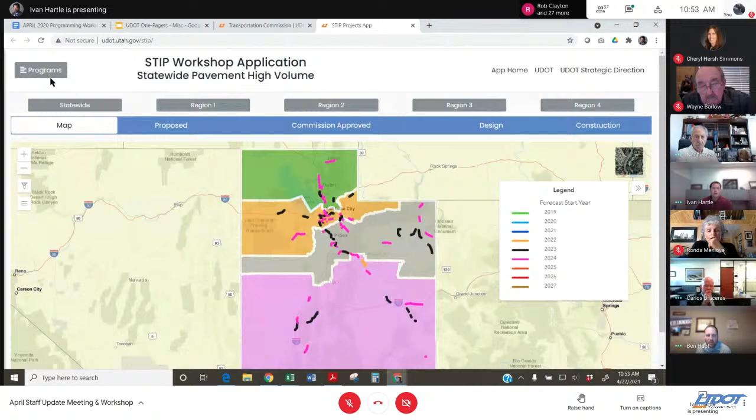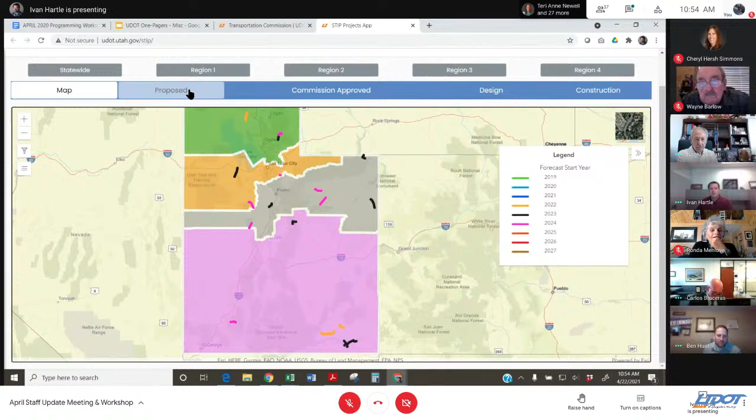You want to jump to the low volume? Okay, under our pavement low projects, low volume, we'll do the same, staying here on our map, shown here on our map. Oh my word, somebody take my mouse away. Our low volume project list here - total of 16 projects in our low volume.

And down here at the bottom of our list, just like this one here showing the top 10 projects, you can navigate between the pages to see the remaining. It does show us at the bottom also a list of our program distribution for this proposed project list.

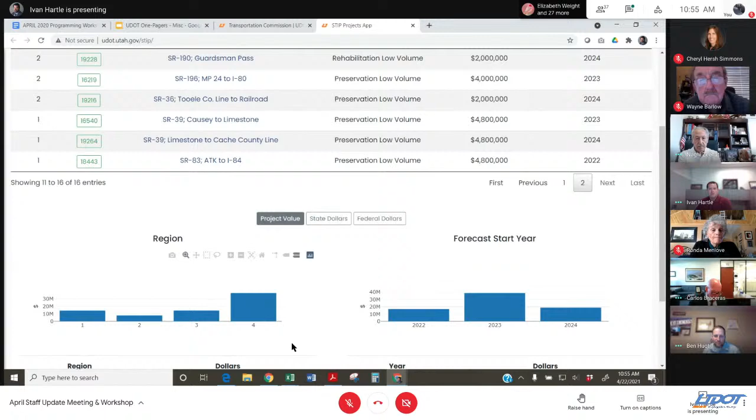We had to come up with a random wheel spinner to pick a project to just highlight next year. Maybe that's what we'll work on with these lists that are somewhat large.

Okay. Hey Ben, I believe that's the projects we had slated to talk about today. So that was quite a few.

Ivan, thank you. Maybe, thank you. I think real quick, Carlos, I'm sorry to interrupt you. I just want to make sure Ben made the comment, he gave me a little recognition for the audibles we had to call while he was driving this morning.

We ran into a production move in our system this morning, and we had a couple of our staff behind the scenes just clicking away at making all of this work. It makes it look seamless. The fact we only had one pager not connected and everything else on that panel, the program briefing, was all green, was pretty fantastic. That group came out of Nathan Lee's technology and innovation team, especially Alex Gilberry, who was really helping us. Unfortunately he's not here to hear that because he's getting his COVID shot right now, so his reward was to go get a needle stuck in his arm.

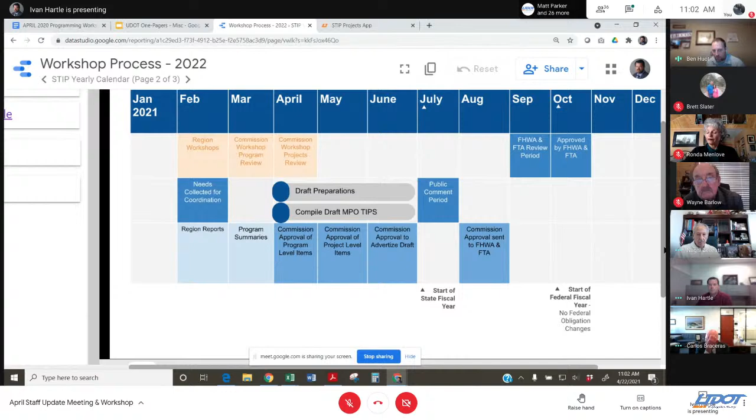With respect to the active transportation 35 million you mentioned, we're finalizing the data needed to create a prioritized list. That's another list we have on the commission website right now.

So this is the projects we talked about. There was the 35 million legislated amount, and we're working on estimates and prioritization of these projects so we can develop recommendations and work with the locals on the 20% match requirement, working toward an August, September timeframe for potential action on those items.

These were the regionally important active transportation projects from our department-approved transportation plan. I jumped around a little bit there, so hopefully that wasn't too confusing, but now that we've gone through all the projects, it gives a bit more context on how this all works together.

Nagi, that's all we had. We could entertain you guys for another hour if you'd like. Well, Natalie is laughing, so I think she wants to. Yeah, show your talent. Otherwise, Jim Evans is getting warmed up. You got to be here tomorrow for that, though. He's scheduled for tomorrow. We need a filler for today. Natalie can cover it today.